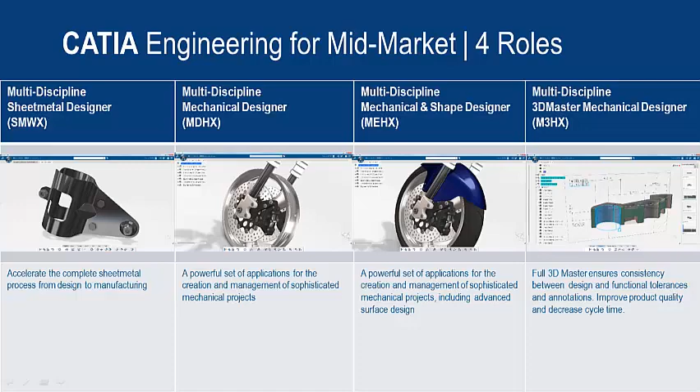For example, let's review the MEHX role for the multidiscipline mechanical and shape designer. The user could start his day by checking all of the pending tasks, then gathering some information within the communities, and can then go into his personal dashboard to get more information on his work. He could start his engineering task with Catia while sharing and collaborating with the people involved in the project. At any time, he could start his design of mechanical and complex parts in his full product context with other colleagues, and then release the part when it is mature enough.

We've identified 10 key value propositions that differentiate the 3D Experience mid-market Catia offerings from any competitor, and we've placed them into 2 categories. The first category is collaboration, and the second category is engineering. When effective collaboration intersects with world-class engineering, it's a winning combination that simply cannot be beat by anybody. So now we'll go into detail on these 10 key value propositions.

First, we'll start with the key value propositions around collaboration within the 3D Experience platform.

The 3D Experience platform can be open to anyone, even non-CAD users, to facilitate collaboration within the company and across the enterprise. Everyone is connected to a single platform sharing the same 3D reference data, so there is no replication of data required. You can open your own environment to external users such as partners and manage their access to the project and information with intuitive P&O management and strong security.

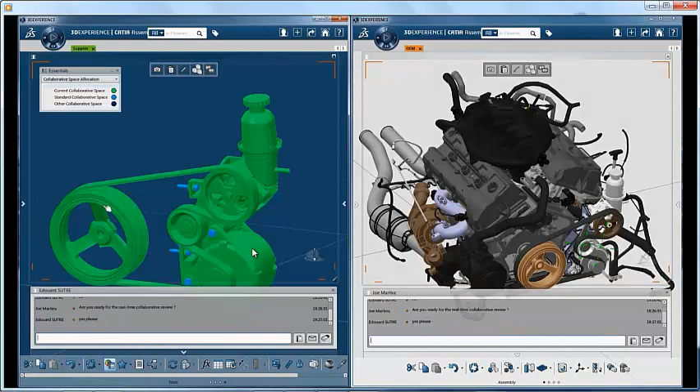What we show here is having two different people connected to the platform. One is the supplier on the left and the other is the OEM. You can see they are accessing the same data but with a different level of security. The supplier on the left doesn't see all of the data, only the data he has the right to see. And he can work on it in parallel with the person on the right. They can collaborate instantly on the same information.

Use the platform for engineering, simulation, and manufacturing, but you are by no means limited to those disciplines. 3D is an excellent communication tool which, as an example, makes the bidding phase easier in communicating with your customers. It is accessible from anywhere, even your mobile device.

The next value is design and collaborate in real time, meaning people can connect to the same data at the same time. Concurrent design at the level of the product is automatically managed. The system can synchronize modifications from everyone working in parallel on the same product, managing conflicts. You don't have to replicate anything. Everybody shares the same information. One single source of truth, showing only the latest version of the project.

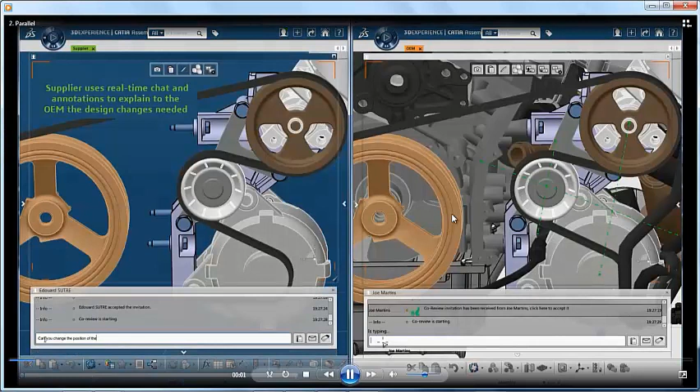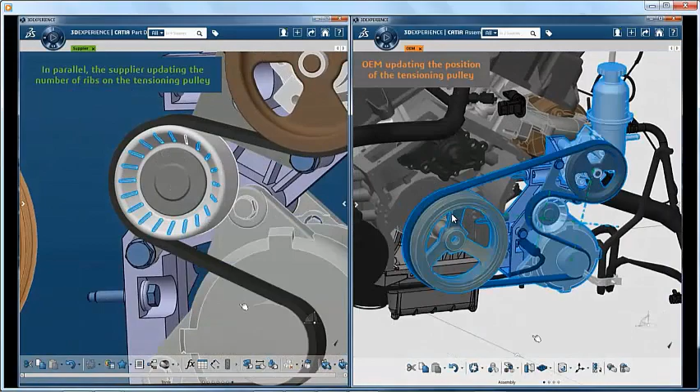Here you can see a good example of two people working on different aspects of the same product. So they are all working on the same data and the same product structure. You can see that both of them are doing different modifications to the same subproduct of this engine. You see the modification on the right, and they can refresh their session so the person on the left can get the modification done by the one on the right. He can see what was done and accept or reject the modification.

Any modifications done by other users while you are working can be retrieved at any time. Co-design capabilities are applicable at the product level or at feature level. Now let's talk about co-review.

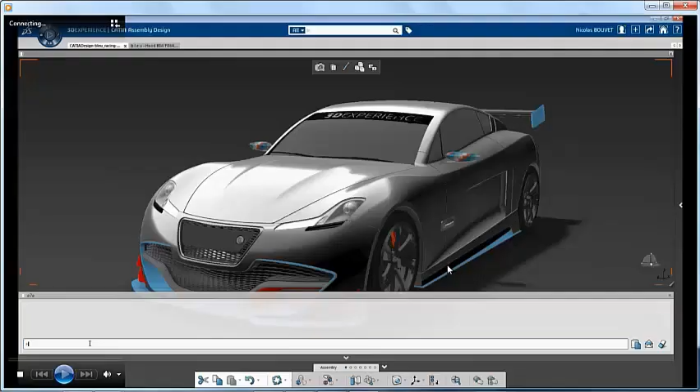While working on the same data, you can see the impact of the modification done by another team on your design. For example, here we have someone working on the styling surface of the hood of the car, and the other one working on the body in white. In parallel they are able to work. The first one has changed the styling surface, and the second one is going on with the body in white design.

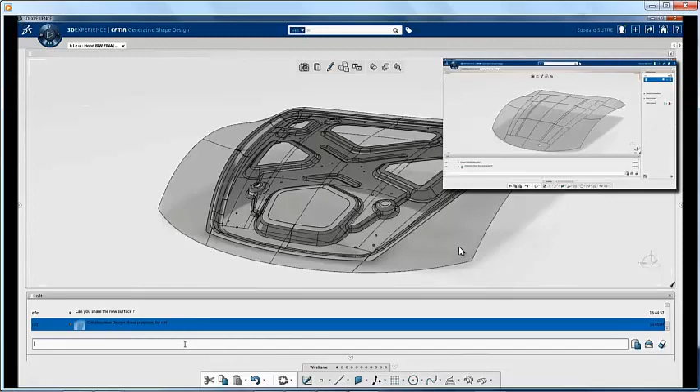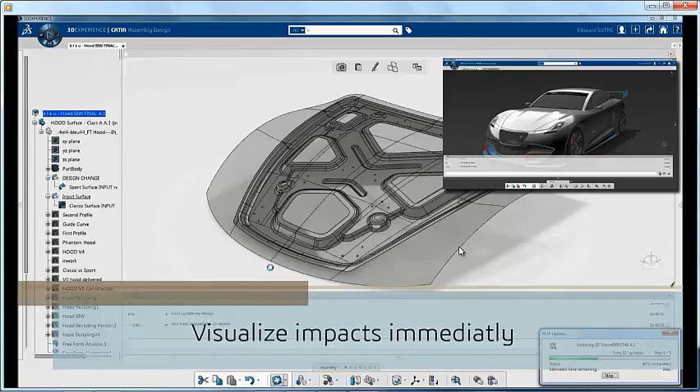Here he is explaining the modification done on the styling surface. The body in white is reviewing the modification on top of his data. He can visualize the impacts and accept or reject the changes. As he accepted the modification, the body in white is updated to reflect the change to the surface. So they are really working in parallel on the same product, and you can see the impacts of the modification on the design.

The next value is to innovate by exploring more alternatives. The user can work as he or she desires, and the system will take care of traceability of the design evolution, allowing the user to come back to any previous design status. This allows users to remain confident and simply focus on their work. They can also manage design alternatives and branching, and there is no need to check in, check out anymore. They have full flexibility on the history of their design.

Manage the life cycle of your product, from design to manufacturing, through versioning. From one version, you can explore different design alternatives, which is something that is most difficult when you work in a file-based system.

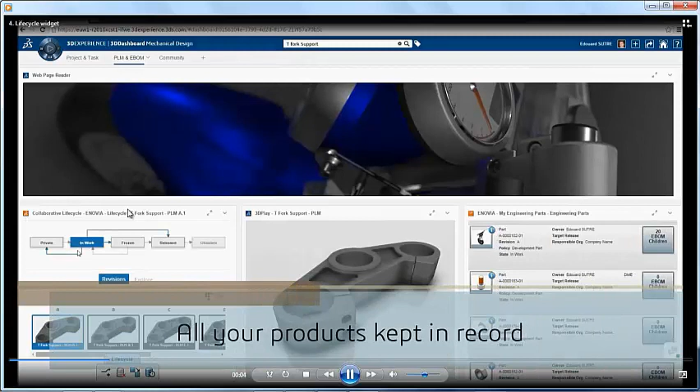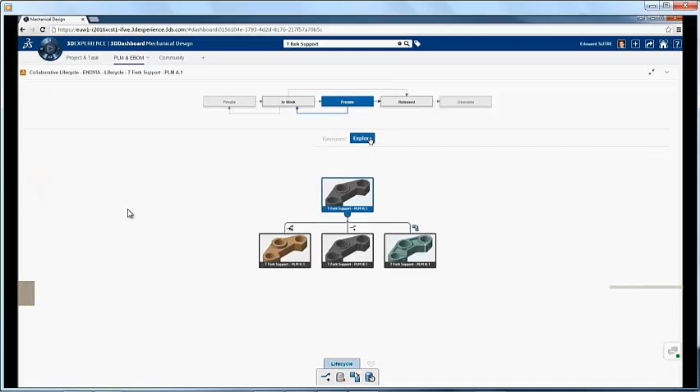Here we show the lifecycle widgets that ask the user to define the current status for each of their data models. It's very easy to understand where they are in the design process, and they can also see from here the different versions and revisions of their parts. They go directly into the web interface, accessible through a web browser. This widget is a new feature starting in 16x.

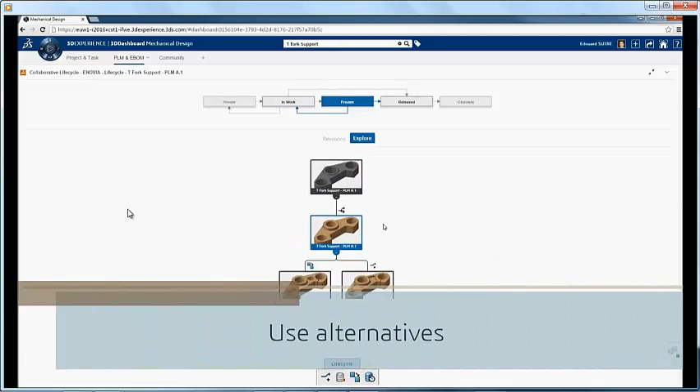Finally, users can manage the design status of their data, whether that be in work, frozen, release, or obsolete, to keep or share their design with their team and the shop floor, according to company rules and security.

Another example of using versions and maturity status is from the Save with Options panel. Here we are looking at some designs in 3D mockup. You can manage also the revisions, versions, and the maturity state of your products directly from the Save panel. It's accessible either in the web interface or directly from this Catia panel.

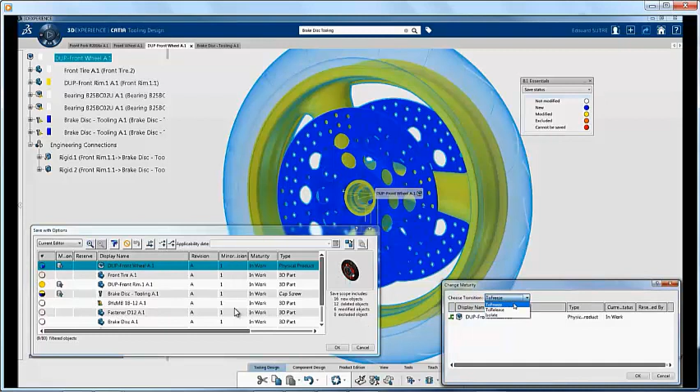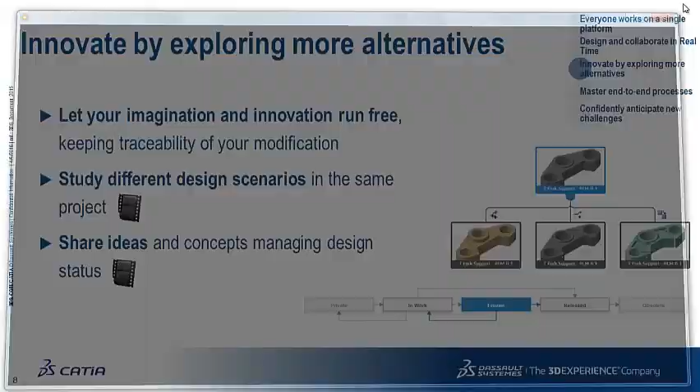One single platform and data model for all applications, all users, through multidiscipline integration. One important thing for these package roles is that you get all that you need. You can do all your design from the concept phase to the finished product with just one role. No extra applications are needed, and all of your applications share the same user interface.

Retrieve efficiently whatever you need for any kind of data, whether they are 3D parts, drawings, documents, etc., and even in a huge set of project data. This is thanks to advanced search and tags filtering.

The system collects for our users critical information for their project and presents this information through custom 3D dashboards, thus enabling them to make the right decisions.

All types of parts, whatever the manufacturing process, can be created with these Catia packages using a specified dedicated application. This covers 3D printed, machined, sheet metal, welded, molded, cast, forged, stamped, formed, and other types of parts.

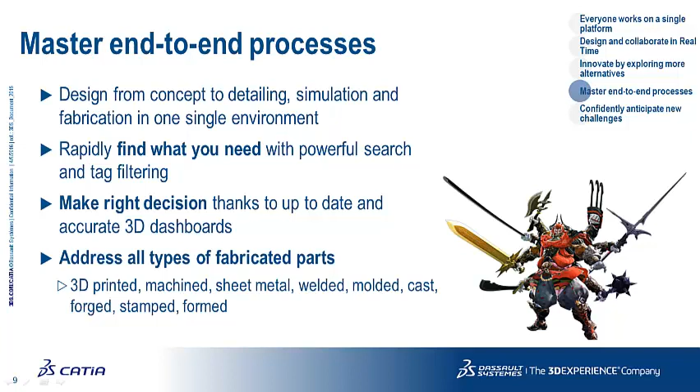The Catia for mid-market roles allow our users to work efficiently with core modeling applications and also open the doors to advanced technologies which are available to extend your processes. For example, composites, systems, equipment such as piping and tubing, electrical, advanced surface such as Class A, machining and tooling, additive manufacturing, simulation using Simulia apps, and finally EXALEAD OnePart.

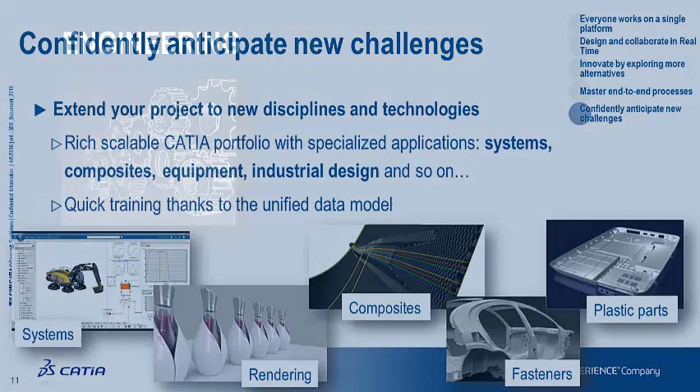That covers the top 5 value propositions around collaboration, and now we'll round out the top 10 values of the 3D Experience mid-market offering with 5 high-value propositions around engineering.

One of the big values of the 3D Experience platform is that whether you are a provider working on a big OEM project, or if your data is big, you don't have to load everything to navigate the data. You retrieve only what you need to be modified. First, users can easily retrieve their work package.

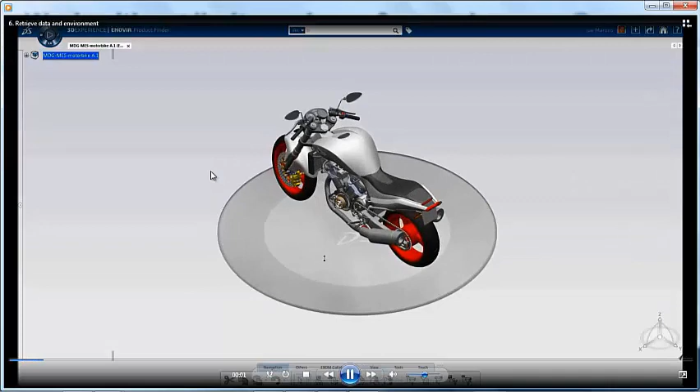This shows how users build their working session on large products. They can navigate instantly in 3D on their product without having to load heavy data. They can then apply some automatic filters or manual selection. They can build in a few clicks their working session with only the data they need, and then at any time open it for modifications.

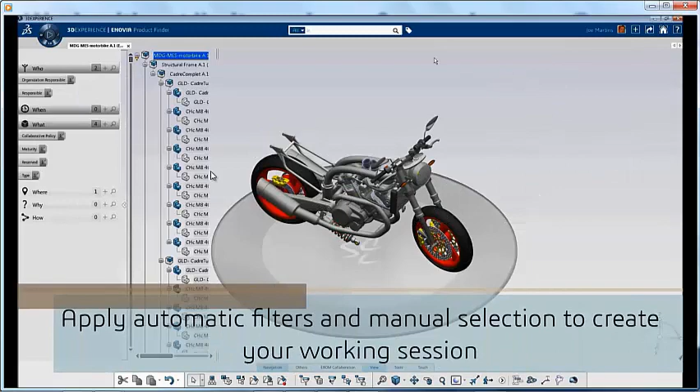Large data handling. Thanks to the 3D Experience infrastructure, users can navigate on very large data with very good performance to understand their product, validate the steps of their project, and define their working session.

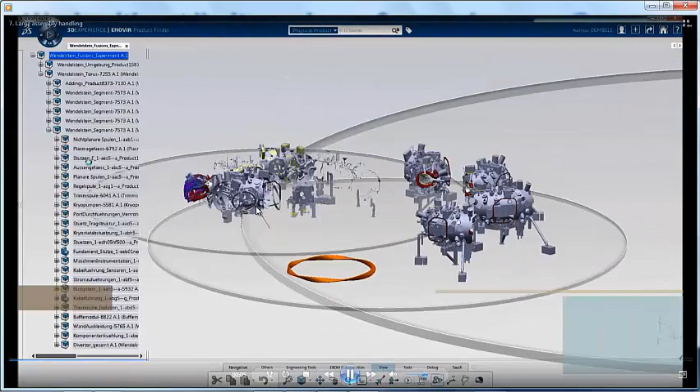This is an illustration of how users can navigate on very large data. These are large and complex products for a nuclear fusion experimental project. You have the building, all the infrastructure, plus the main reactor. See how quickly you can navigate on the 3D data down to the part level, understanding the complexity of the structure.

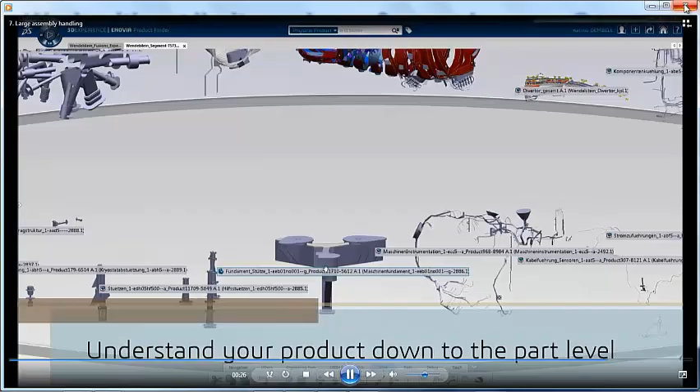Business Intelligence Essentials, Information in 3D. A project is not only 3D information. With the Business Intelligence app, users can visualize all sorts of information from the database with color coding that can apply to maturity level, collaboration including lock, unlock, and owner, versioning, design status, materials, simulation, weight, clash and contacts, and more.

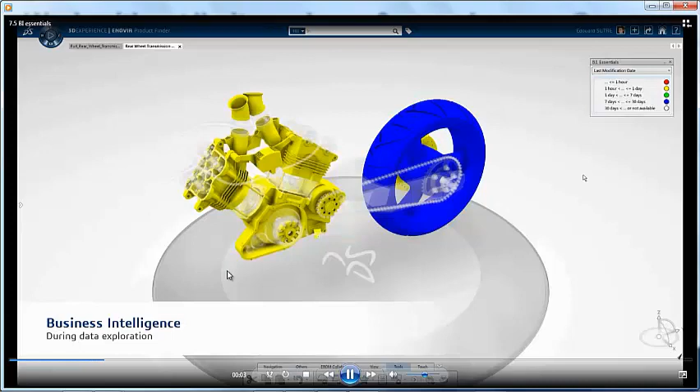For example, on this product, the user can check on things such as the last modification date, the reserve status such as which parts are theirs and which are not, or the weight definition and distribution. In this case, green indicates that we know the weight and red means we need to define it. Then the user can see what are the heaviest parts of their product from this color coding.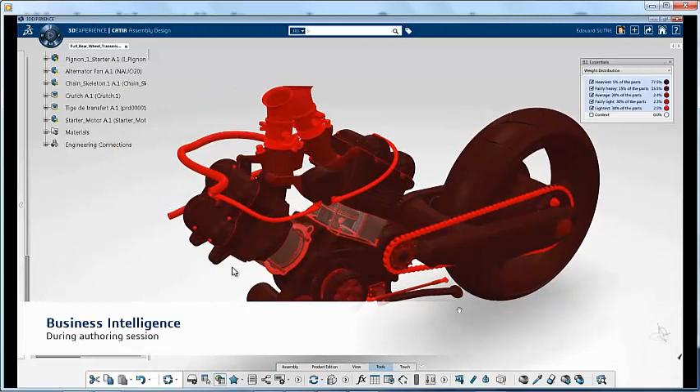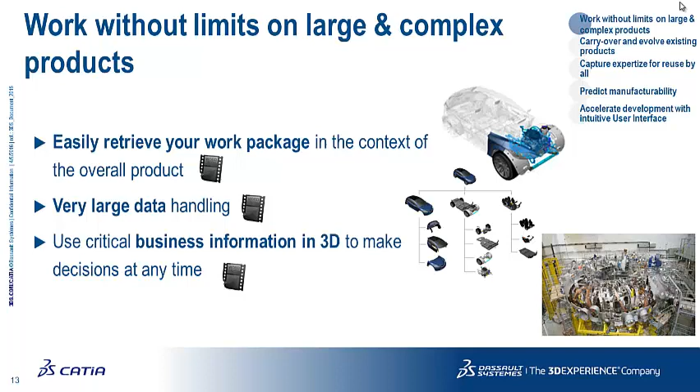There is no limit to this kind of information, as any information can be analyzed with a custom color code. In the 3D Experience platform, you do not have only 3D data, but all the information needed to make decisions with easy access.

Users seldom start a project from a white page, as they typically reuse many assets from previous projects. Catia provides users with a set of powerful tools to do just that. This includes XCAD, which allows data from other CAD systems to be reused using a neutral format and/or optional connectors.

Catia 3D Experience can reuse data coming from any CAD system. Here we illustrate how to create a hybrid Catia assembly. First, we found both Catia V5 and SOLIDWORKS data in the database and inserted it into the product structure. This was done without conversion.

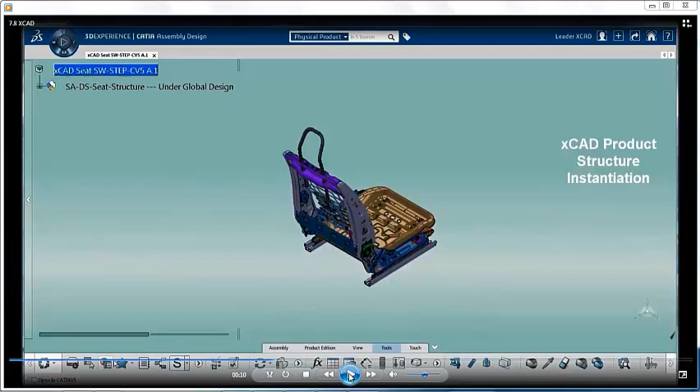We can check at any time the origin of the data directly in 3D with easy and understandable color coding. And here we finish by inserting some data from a neutral step format. In the end, we have created a hybrid Catia 3D Experience product, inserting sub-assemblies coming from Catia V5, SOLIDWORKS, and step files, all with no conversion.

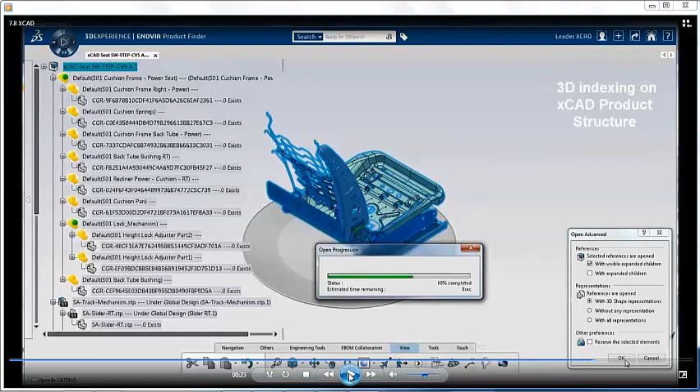Thus, you centralize the information in one single DMU, allowing users to get access at any time to the latest version of the design. This allows accurate design review and thus minimizes design errors drastically. In addition, the problem of BOM-CAD mismatch between the product structure and EBOM goes away.

And finally, with a data-driven project management system, resources can be assigned to tasks in a work breakdown structure. No more surprises, no more outdated and incorrect information. Your project managers get real-time project status updates without time-consuming manual efforts.

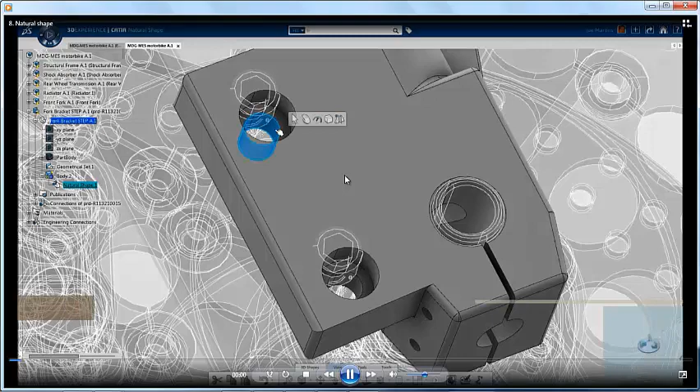Users can also modify data coming from any CAD system. In this case, the user gets a step file containing data created outside of Catia. Thanks to natural shape, he is able to modify the part. He doesn't have the specification of the part, and he doesn't know where it came from.

However, he can still modify it with direct manipulation. You can see that he is able to delete the fillets and create a new pocket on this part, and then redo the fillets again.

And finally, Smart Duplicate. The next example is how a user can reuse existing assets thanks to the Smart Duplicate functionality. Here we have this existing wheel, and the user wants to duplicate some of the parts of the product but not all of them.

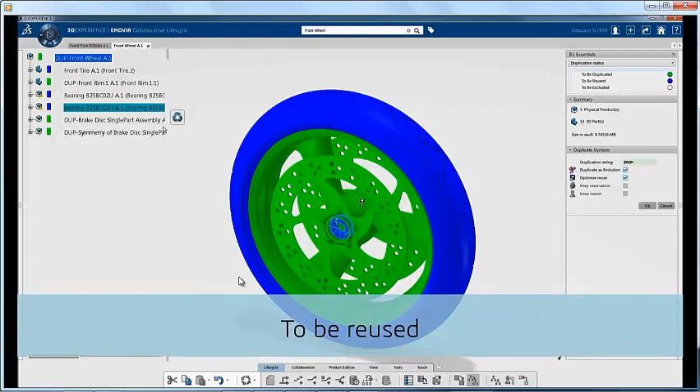And it's very easy to do just by selecting in 3D the ones they want to be reused, the ones they want to be deleted, and the ones they want to be duplicated. In this example, they will reuse the tire, they will duplicate the rim, and they will delete the brake disc.

Being able to reuse company expertise is one of the key values of Catia. This is done with what we call knowledgeware apps, which let you reuse designs and methodologies captured in smart adaptive templates.

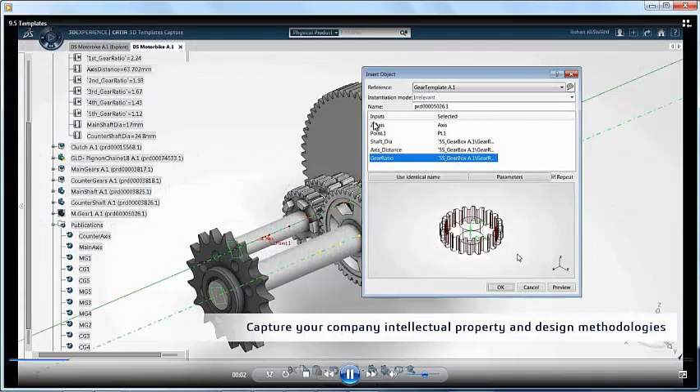The template functionality allows you to capture your in-house know-how even for complex products like this gearbox. In a first example, we use a template for the gear wheel. All the different parameters can be changed, and the resulting part is modified accordingly, so you can generate all types

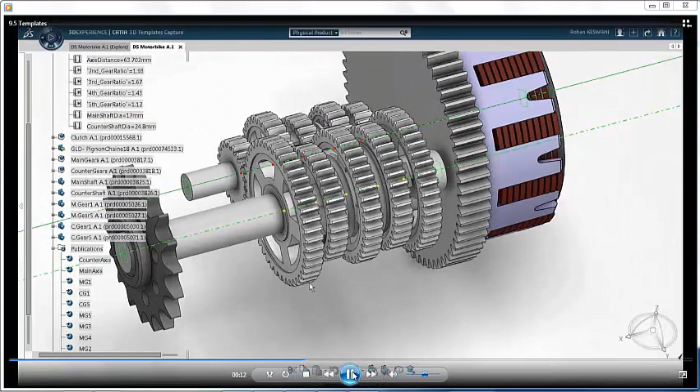of gears from one template definition. In the second example, a template was then created for the whole gearbox product. All you have to do is define the main axis and the ratios for the different speeds, and the whole gearbox is created with the right geometry, such as the size of the wheels, module, number of teeth, etc.

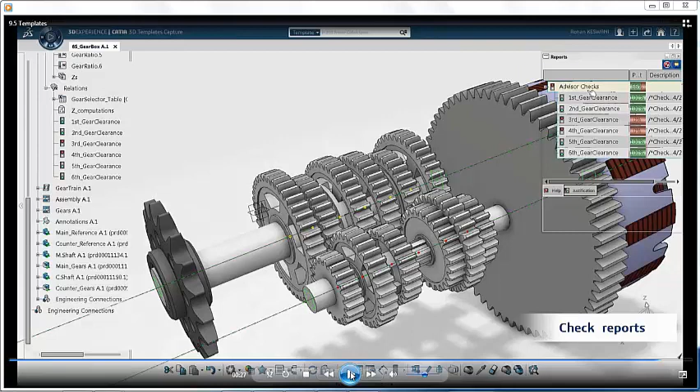Finally, a check report is created on your product to check if you are compliant with the company standards and rules. This very complex mechanical product is instantiated in a few clicks and adapted to our new product.

Here's another good example with the tooling app. We want to add some screws to fix the brake disc to the rim, but there are no holes for the screw in the rim.

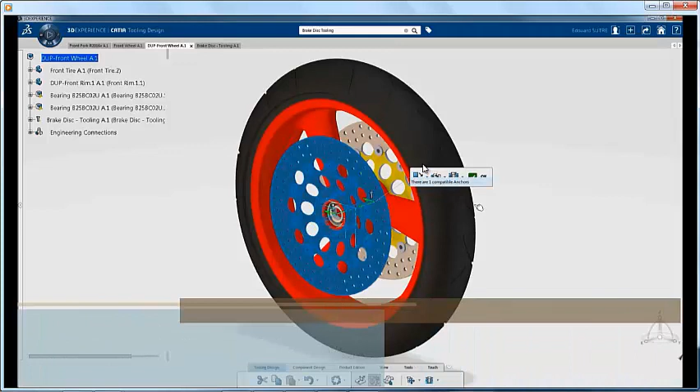Some tooling information was added to the screws, defining the hole for each screw and the type of connection to be created. So when adding the brake disc assembly to the product, the holes are automatically created in the rim with the corresponding rigid connections.

Create smart models using relations between the parameters of your model. Using parameters, formulas, rules, and actions on your model allows you to define simple to complex automation, helping you on your repetitive tasks and reducing drastically your design time and the risk of error.

Run checks to validate your design and generate reports. The last point would be to use checks and rules to assess your design quality, as we did with the gearbox example. You can apply design checks and manufacturing checks to the model and generate a report on what is red and what is green, while also providing correction advice.

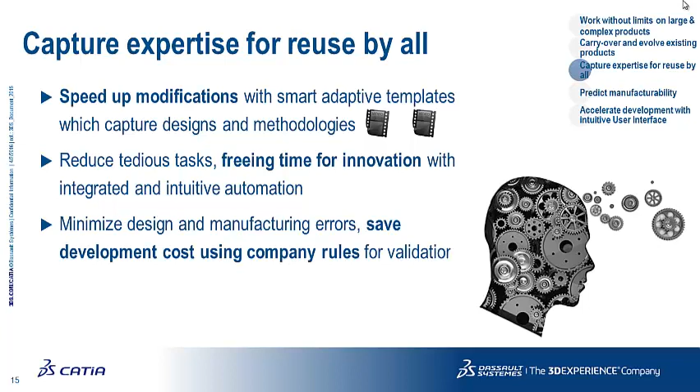For any manufacturing process, use process-oriented features to ensure feasibility early in the design phase and access to manufacturing simulation in the design context to predict part production. Ensure company standard compliance and design quality. Let's go more into the details by process.

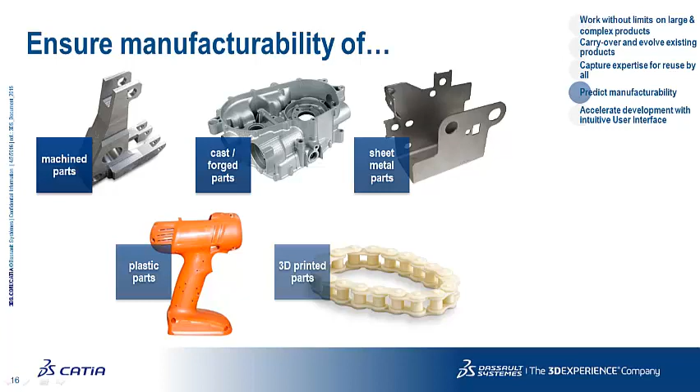The Catia modeler allows you to design complex features such as drafts and fillets with advanced definition and stable computation. The multi-body functionality helps you to improve update performance and robustness of the model and optimize design organization for better collaboration and easy understanding. Contextual design with associativity and link management allows fast design changes and easier reuse of existing parts in a different context.

Concurrent engineering, teams working on the same part. It's possible for several people to work in parallel on the same part, exchanging features and results through the collaboration platform.

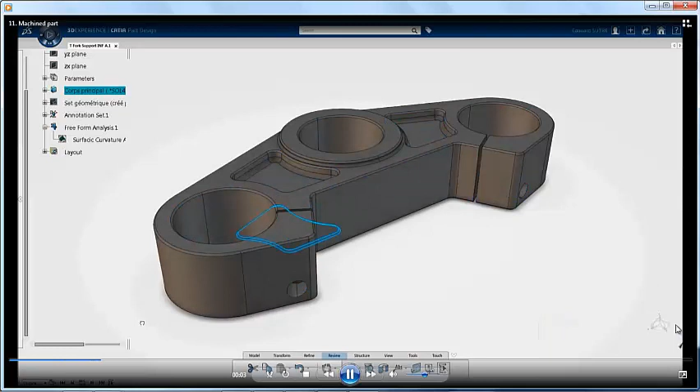Once the part has been created, powerful analysis tools help you to ensure the manufacturability of your part, such as surfacic curvature analysis and wall thickness analysis with sectioning capability.

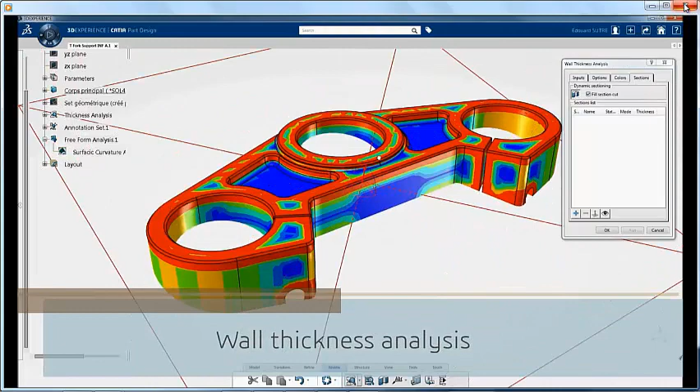Auto draft and auto fillet functions allow you to generate all of the dress-up features automatically on complex parts, gaining several hours compared to a manual method.

A specialized app helps you to design your mold with core and cavity specifications and parting lines and surface creation with associativity to your design.

Some specific features for molded parts ensure the manufacturability of the part, taking into account some process-specific constraints such as draft direction, draft angle, shell thickness, and so on.

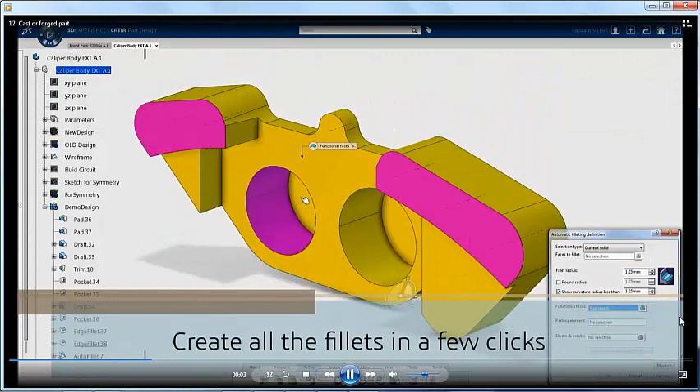The auto fillet functionality allows you to create in a few clicks all the fillets on a very complex part. This is done in 30 seconds compared to 30 minutes with a manual method. A draft analysis tool is also available to ensure the mold release of the part.

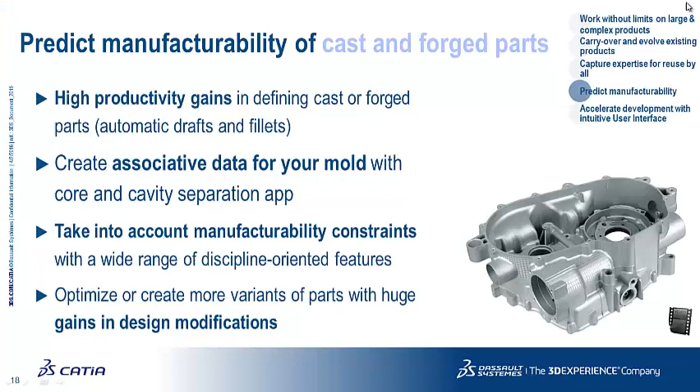Define your environment and parameters according to the material you are using, thickness, default bend radius, K-factor for neutral fiber definition, etc. Unfold your part at any time during the process and work concurrently on the folded and unfolded views.

Manage the manufacturing sequence for bend, cut, stamp, flange, etc. Generate characteristic lines for tooling definition. Check materials overlaps and feature distances, such as stamp versus hole, edges, etc.

Reuse standard tools that are already available on the shop floor. Manage standards for sheet metal definition using DXF format. Recognize a sheet metal part coming from any CAD system automatically by utilizing feature recognition and continue your design.

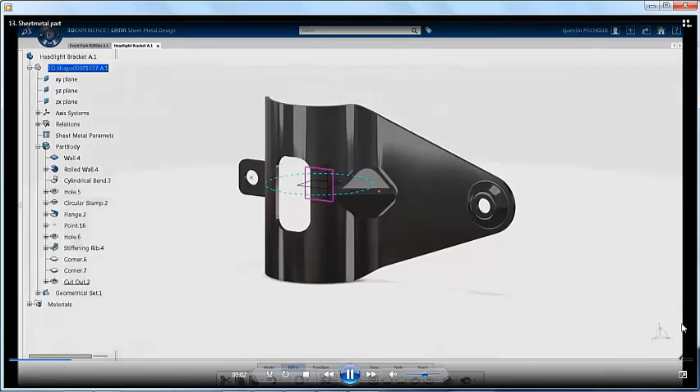For sheet metal parts, you can work simultaneously on the folded and unfolded views of the part. You can also generate automatically the bend process operations to get the part and then reorder the different operations for validation.

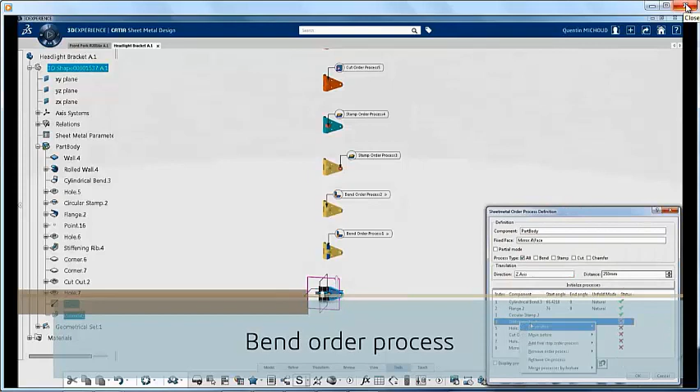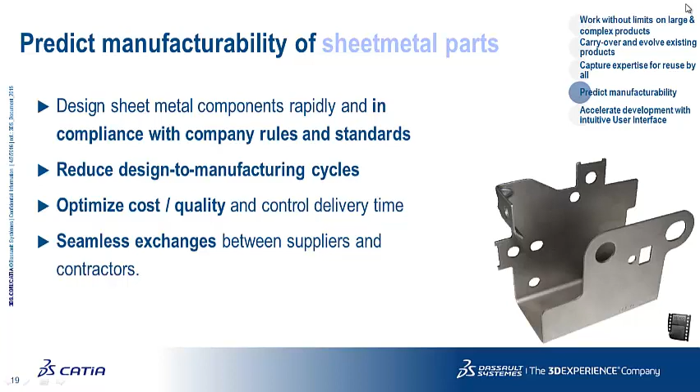Define the different functions of the elements in your part to create the overall shape. Reserve spaces for electrical or mechanical components, ribs, shell, etc. Use features with embedded behavior supporting manufacturing process requirements, such as defining default draft direction and angles, default shell thickness, and managing draft and thickness analysis.

Regardless of the order of creation of the different design features, you always get a geometrical result. Design is more tolerant to errors and you never get stuck, generating as many design alternatives as you want. In some packages, a plastic injection simulation app is available, allowing you to validate the injection flow from the design phase.

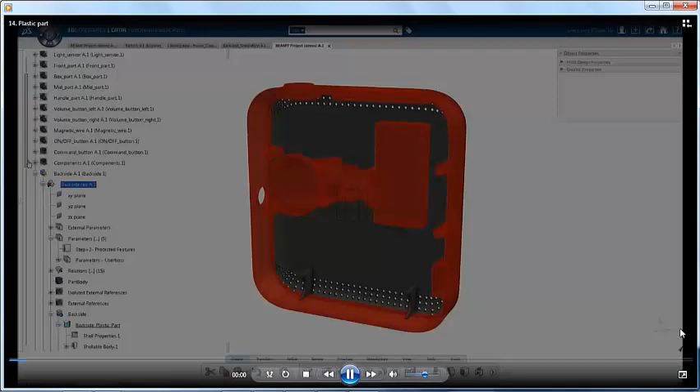Here we see the use of functional design technology to create plastic parts. Process-oriented features are used to define the different functions in your part. We see reserve spaces for the different electronic components, shell, internal or external ribs, etc. Using this method, you get a constant thickness and a constant draft angle from the beginning.

This example is the enclosure of a small projector. The protected areas for the optical components are displayed in red. No plastic material is allowed in these zones.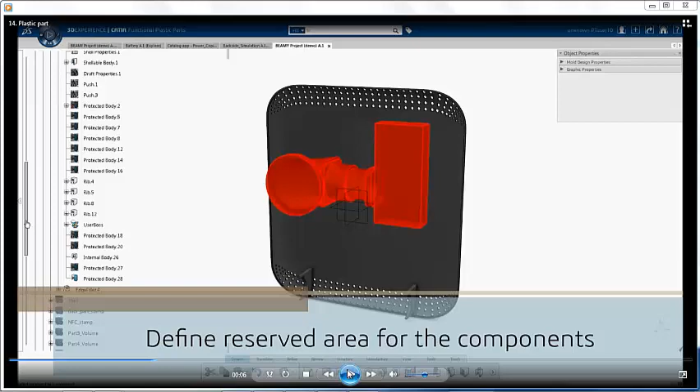To create the speaker's housing, we use advanced design features such as the push function, combining in one step several design operations to push faces, create holes, design intersection fillets, etc. Finally, the designer can simulate the injection flow from the design phase to validate the manufacturability of this part.

Create shapes that you couldn't even imagine before with additive manufacturing. A specific app is available to analyze and improve your surface quality and generate export files for your 3D printer.

As an option, you can recreate a real design based upon any mesh or cloud of points generated by a simulation tool for topological optimization. And the last one is 3D printed parts.

You can easily reconstruct your parts, for example, if you get a mesh of points. From there, we have a specific application to export the data to a 3D printer using the STL format. The true value here is that it's part of the platform, so you don't have to export the data.

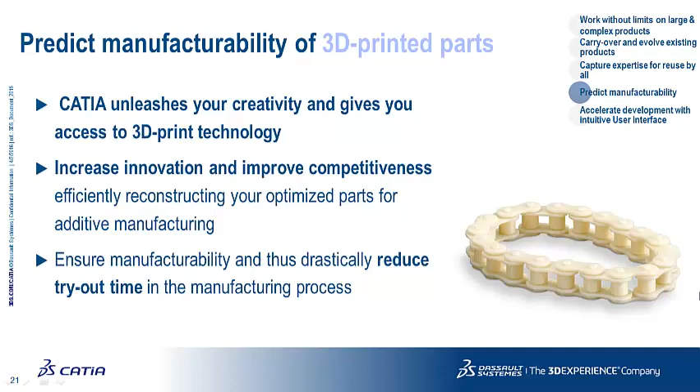The last point is about the efficient and intuitive user interface: one behavior for all apps, which applies to the compass, top bar, action bar, search, etc.

You get one unique user interface for all applications on the platform, with the same user experience and the same elements: the compass to choose your roles and applications, the search field to retrieve your data, the menus for common functions like save, new, etc., and the action bar with all of the app commands.

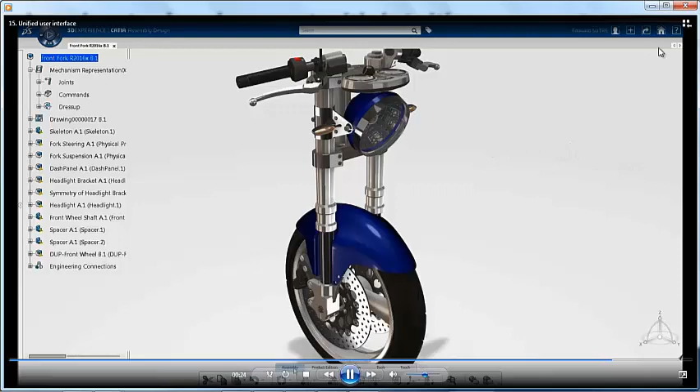Mouse miles and mouse clicks were dramatically reduced to be more efficient in your design, not spending too much time going across the screen to get the right functionality on the submenus and so on.

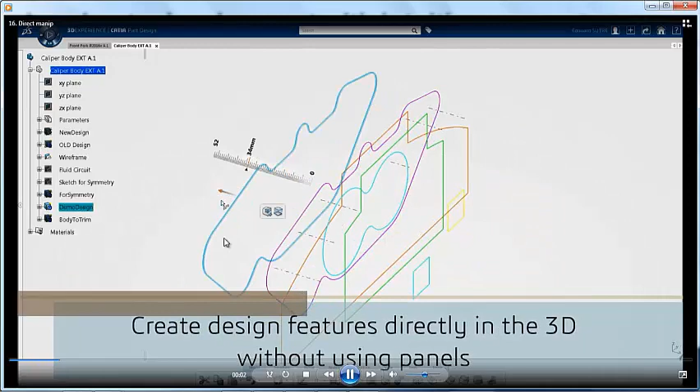It is possible to create design features with direct manipulation in 3D without using any panel. Examples include extrusion, fillets, holes, patterns, etc. But still you get some features created in the specification tree that can be modified later. Everything is done without using an icon or a panel.

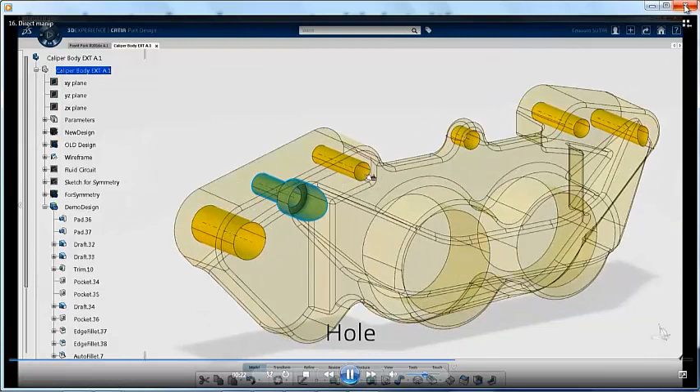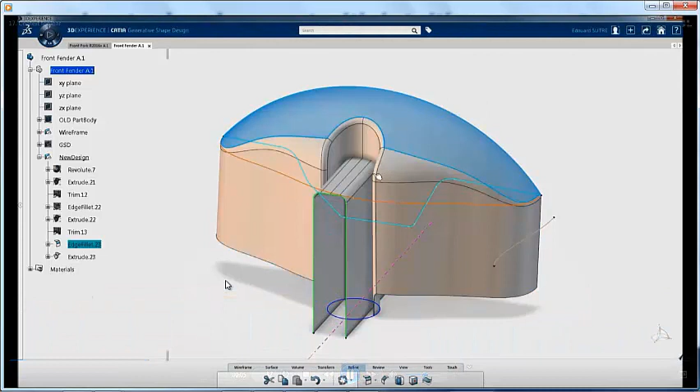Another example is the contextual toolbar. Depending on what you selected, you are proposed the compatible actions. So for example, here we can create an extrusion from a sketch, and then from two surfaces create a trim. As you can see, we're always in 3D with no need to go to the action bar using icons, panels, and properties, saving 50% of the clicks.

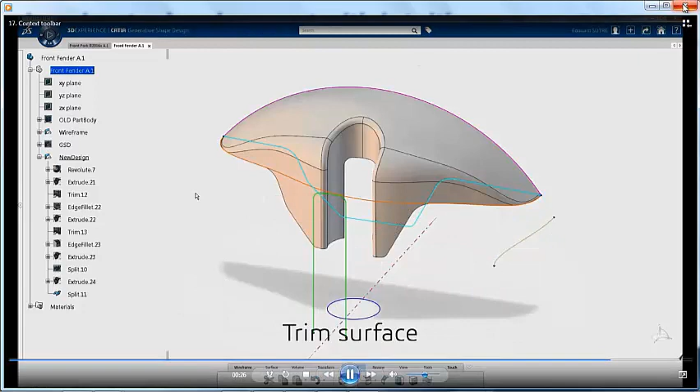The last functionality is the action pad. All your most used functions can be gathered within one panel, popping up anytime right under your cursor. It can be triggered by any key, such as the spacebar.

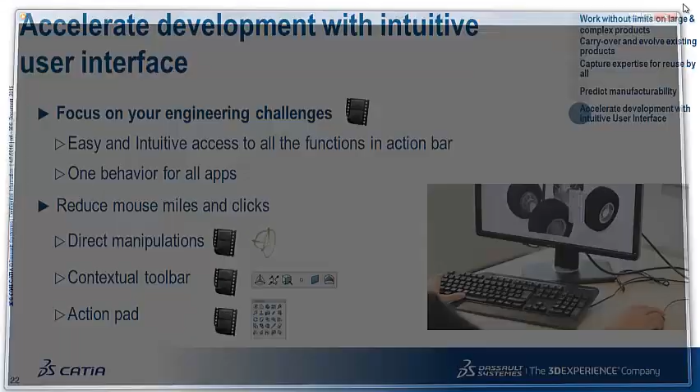In summary, the Catia for Mid-Market offering provides world-class and unmatched value propositions not available from any other system. We have reviewed here 10 of the top value propositions which cover collaboration and engineering, and which together uniquely position Catia on the 3D Experience platform for our mid-market customers.

This offering, which consists of roles and extensions, is intended to provide everything that a typical user would need to do. They are the right products at the right price for our mid-market customers, and we have numerous customer examples to illustrate success with this offering.